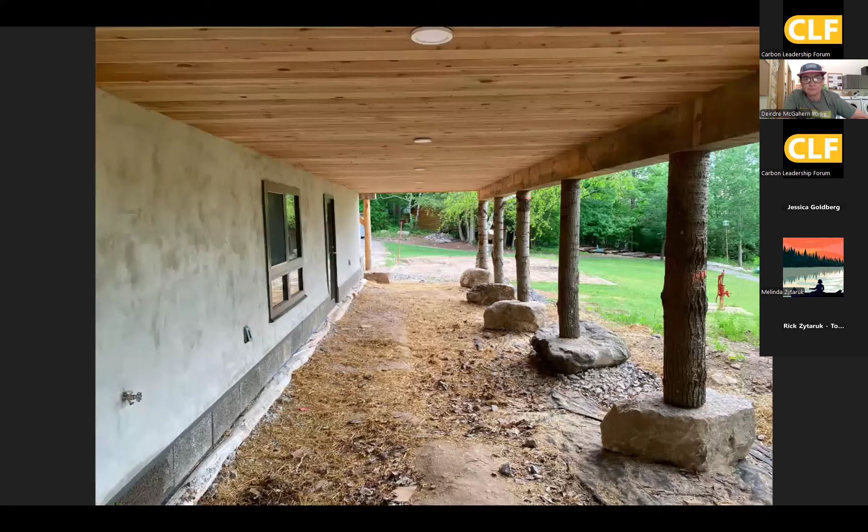Quick walk around. So I'm actually sitting right here. This is the entrance to the health center where kids would come in if they need a Band-Aid or something bigger than that. Then they'd go into the exam room where they would see a nurse. There's two sick rooms if they need to stay overnight. And then there's a nurse's quarters at one end of the building. So this is the living room.

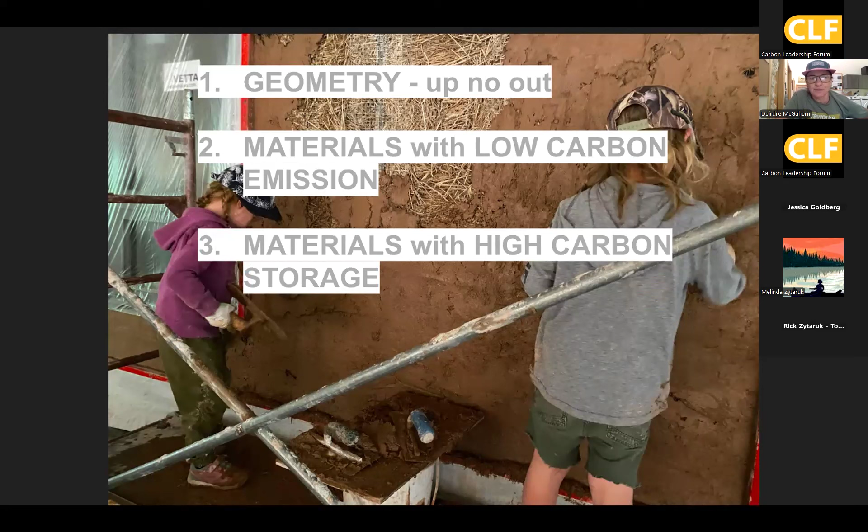So, how did we do this? Well, geometry plays a big part. We're going to look at that. And then also, really just every step of the way using materials with low carbon emissions and using as many carbon storing materials as possible to offset the emissions, which inevitably add up. This was bring your kids to work day, so I had to find a way to work that slide in.

If we're looking at the geometry here, the old construction adage that it's cheaper to go up than out is also true for embodied carbon. Foundations and roofs generally have high carbon emissions associated with them, whereas I see walls, floors, and roofs as empty cavities that we can fill with carbon storing materials.

If we had taken the same footprint of this building and spread it out, like into a long bungalow over a full basement or even a concrete slab with a full roof, the carbon emissions would have gone up. What you're looking at here is a partial walkout basement, just under half of the building. The back two walls backing into the hill are Nexcem, and then as soon as we could, we switched to carbon storing straw bale walls in the walkout basement, and straw bale walls above, with floors filled with dense packed cellulose and cathedral ceilings filled with dense packed cellulose.

Right off the hop, at the foundation stage, the building sits on a 2 foot by 5 foot bed of compacted stone instead of a conventional concrete frost wall that drains to daylight.

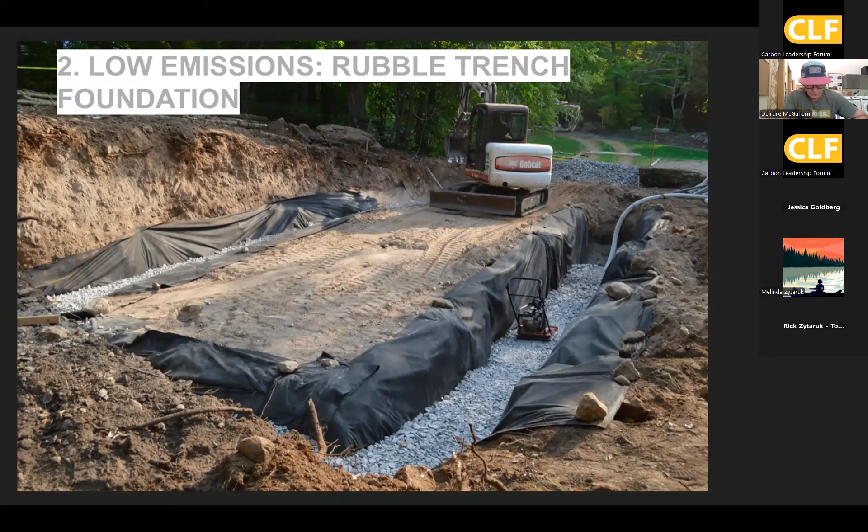By choosing concrete with the same strength but a 50% SCM content, we decarbonize the concrete fill in the Nexcem foundation walls by approximately 30% in just one phone call to our local concrete supplier. It's by far the easiest concrete or embodied carbon reduction that we can make.

We used leftover Nexcem blocks from another project for the two below grade walls, as I said before, switching back to carbon storing straw bale walls for the above grade walkout walls.

Nexcem is an insulated concrete form made of wood chips in cement from 75% recycled wood material. It's made here in Ontario.

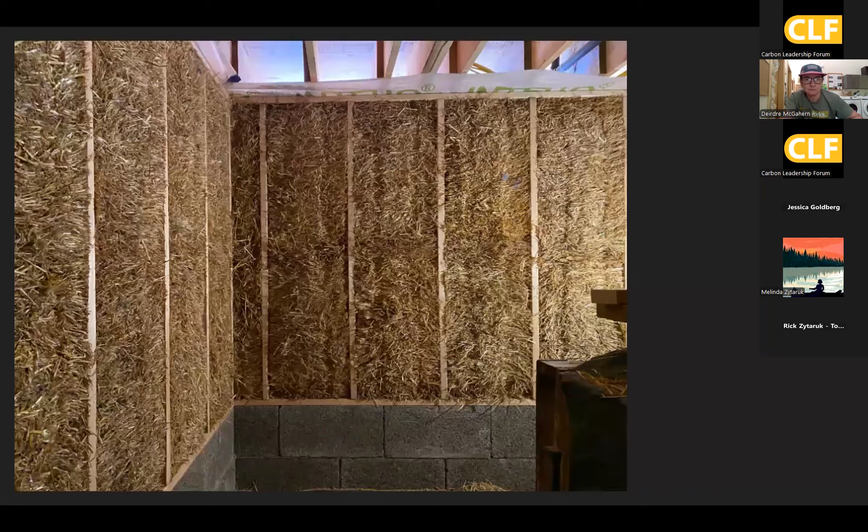These are the straw bale walkout walls on top of two courses of Nexcem block.

We unearthed these major boulders during the excavation and felt like we had to use them. We also took down some poplar trees. So in one quick phone call to the engineer, we were able to swap out concrete piers for big boulders, again sitting on a rubble trench foundation, and poplar posts right from the site instead of cedar posts.

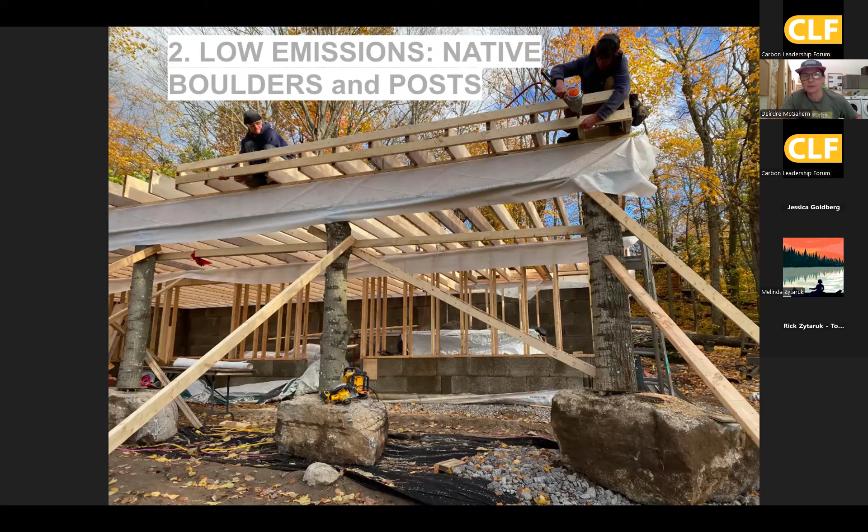I like to tell kids this story because the trees came down and then they literally went back up in the same location.

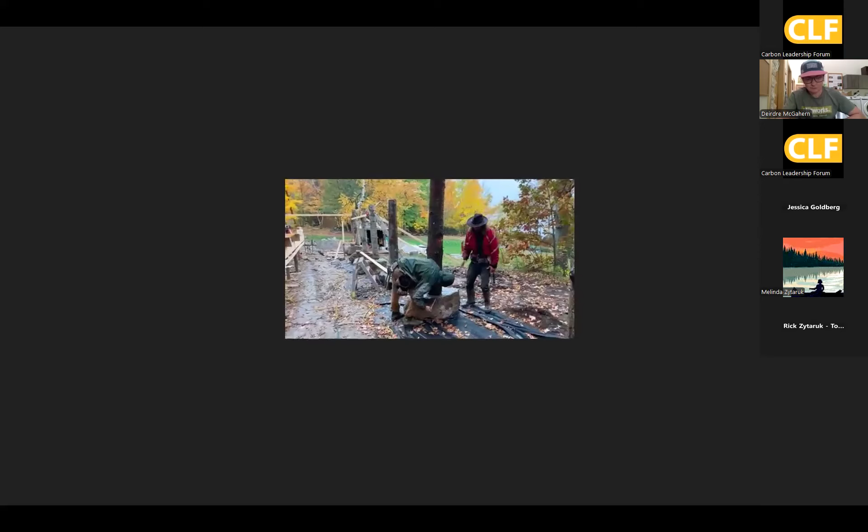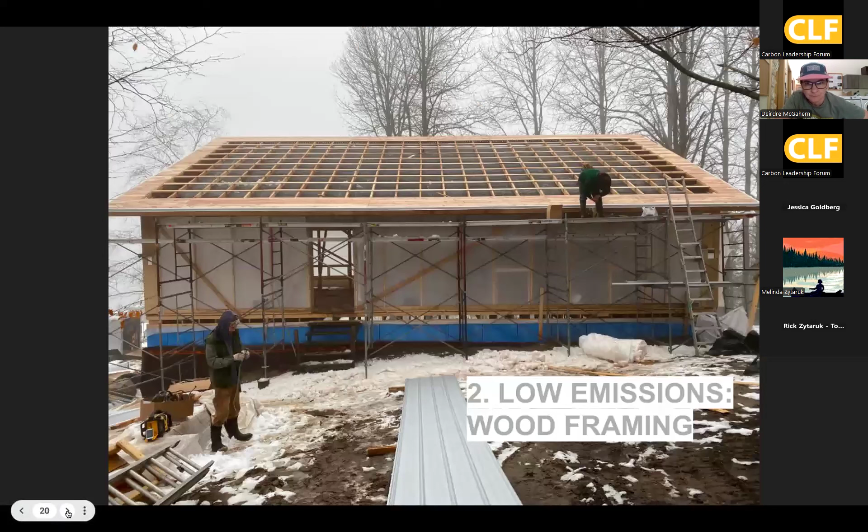Wood framing for the walls and the roof, again low emission. Get the roof on, and then the biggest climate hero on the job site is also our signature work.

Tightly fit between a double row of studs, the 300 bales are storing just over 5,400 kilograms of carbon. They're also locally sourced, highly regenerative, non-toxic, and offer excellent thermal performance.

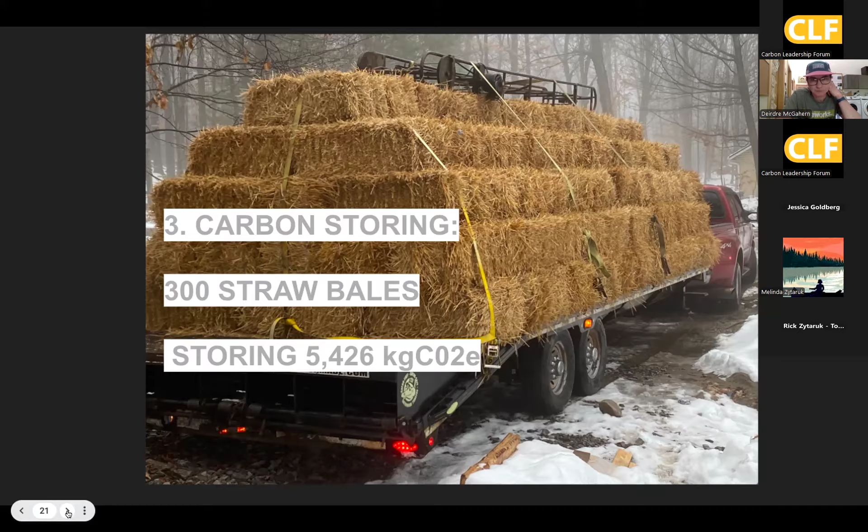We'd definitely be a carbon sink if we just filled the building entirely with bales of straw, but we do just put them in the exterior walls.

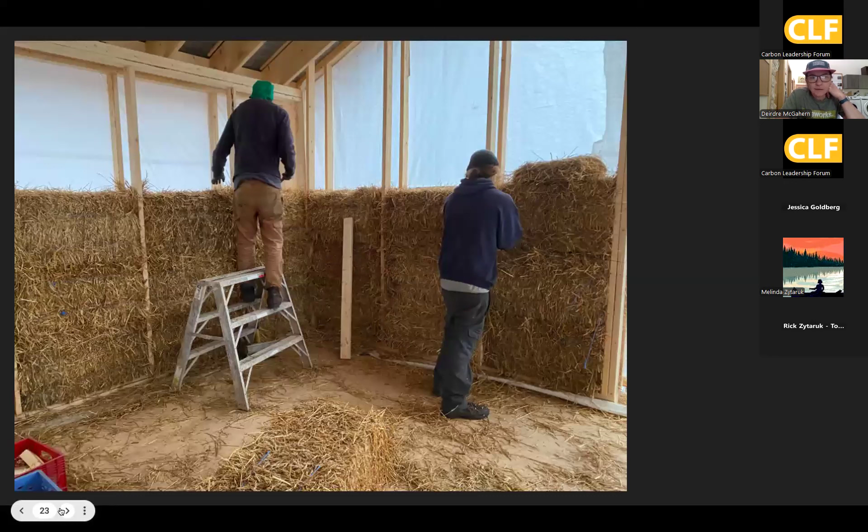This is what that looks like, giving them a haircut. Lots of prep work to ready the bale walls for plaster.

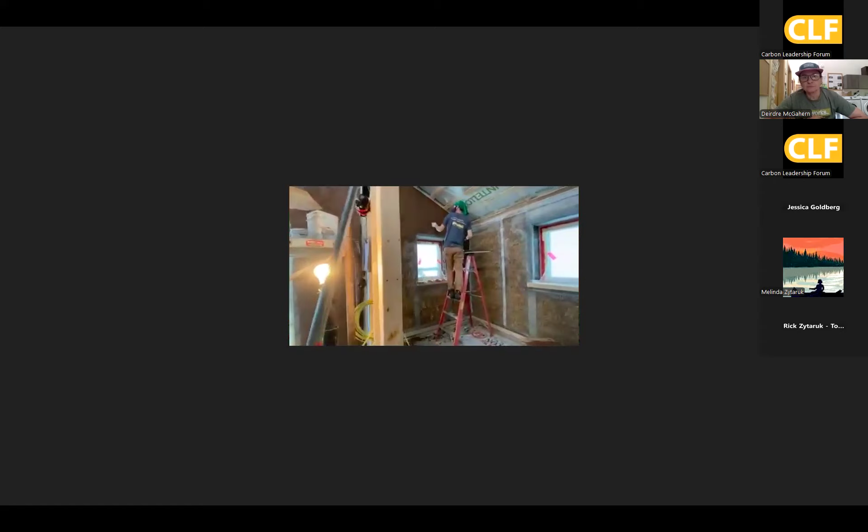The early straw bale houses in Ontario were plastered with cement, lime, and sand, and we haven't used cement in our plaster since 2009. Clay and lime offer better performance, less maintenance, and lower carbon emissions.

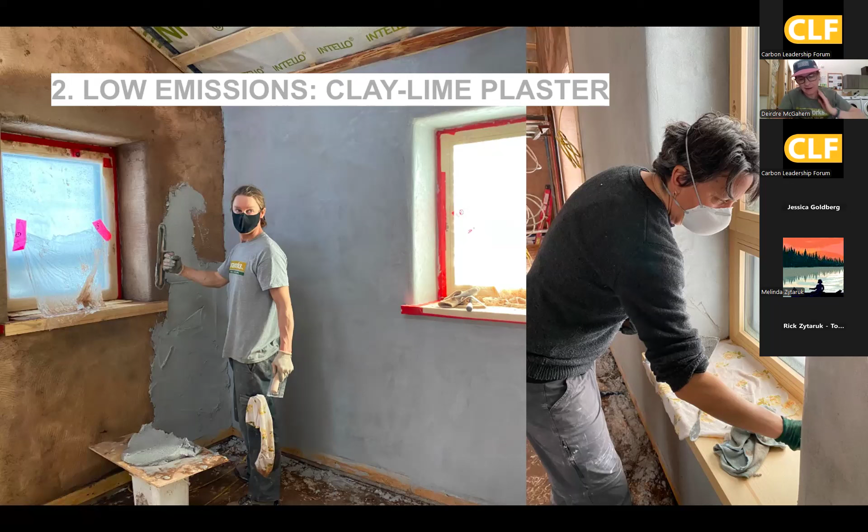The runner-up to straw bale walls is definitely dense packed cellulose. The cathedral ceilings, the wood frame floors, and some interior walls are all insulated with carbon storing dense packed cellulose. And it all adds up to an impressive 6,538 kilograms.

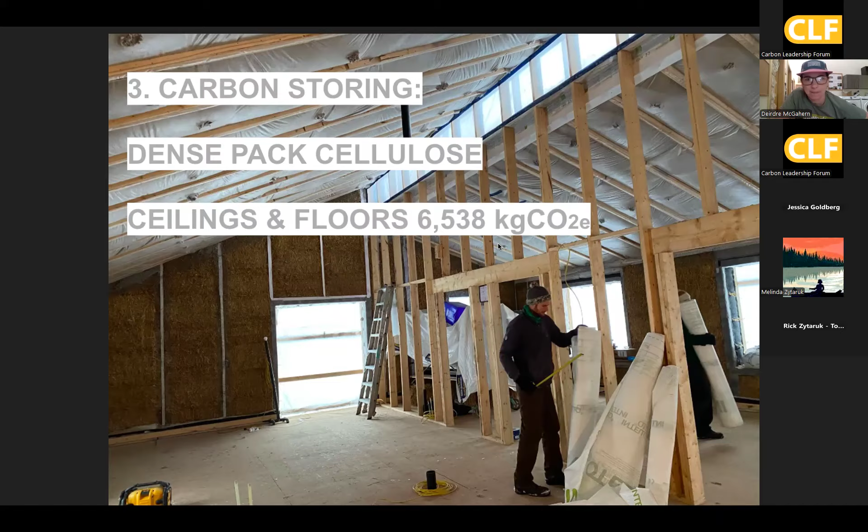We insulated the interior walls mostly for soundproofing with hemp bat. Maybe I can throw this out there - this is a test or a question for the group: is hemp bat a carbon storing material, or is it a low emissions material? We can come back to that.

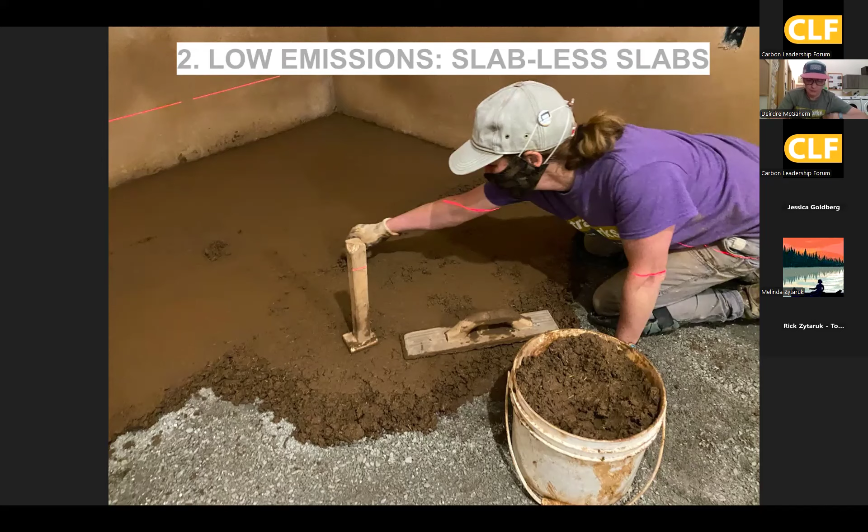Something else that we do is slabless slabs. So instead of calling the concrete truck back to pour a slab in the basement, we compacted a 5-inch base of limestone screenings over gravel insulation and topped it with a 3/4 inch earthen floor. We use cement, but sparingly and mostly for below grade and structural applications.

So the basement floor of the health center is insulated with two different types of recycled glass, Glavel, which is out of Vermont, and Poraver, which comes from Ontario. Both are made by heating and expanding glass into insulation suitable for below grade applications.

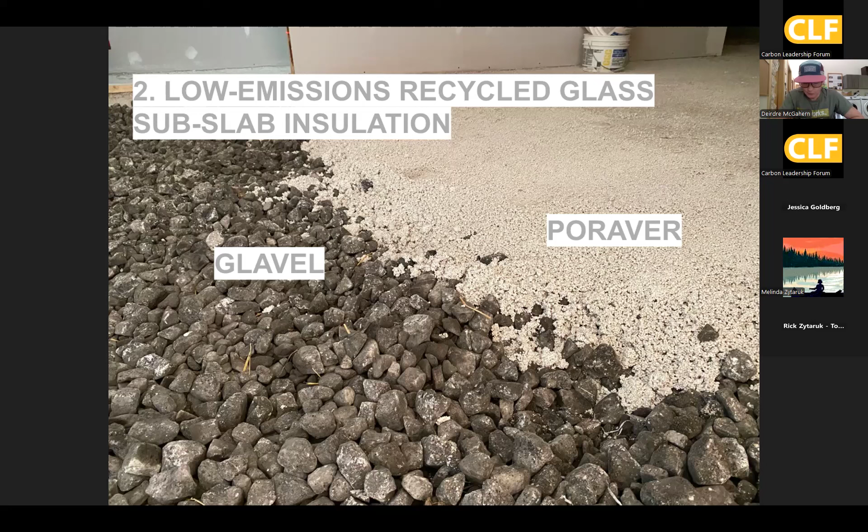Our earthen floors are glossy, water resistant, and hard like polished concrete floors, except the binder is clay instead of cement. On this project, we installed 173 square meters of earthen floors, on the main floor and in the basement. And at just 3/4 of an inch, this innovation is more in spirit than in drawdown reality.

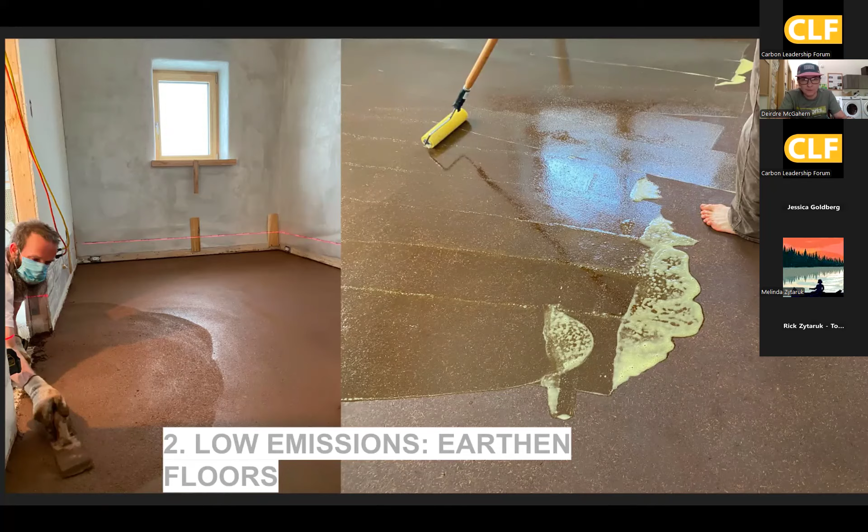Like straw bale walls, except that there is chopped straw in them that we use as fiber, these floors allow us to deliver the slabless slabs, which offer significant carbon reductions by avoiding cement. So those two innovations work together. Honorable mention to carbon neutral lime paint and green roofs.

The health center's operating emissions are also low thanks to the climate-friendly Sanden high-efficiency air-sourced heat pump. The Sanden uses CO2, a benign refrigerant, compared to the highly potent hydrofluorocarbons in most heat pumps. For the last 4 winters, it has solely heated all the domestic hot water and the health center hydronically through the earthen floors. It's all powered by Peterborough's relatively clean grid, which is 71% hydro, 28% solar, and 1% biogas.

So what's new and exciting? Well, I'm working today. We're building a sleep cabin right next to the health center at Camp Kawartha. And we're pretty pumped that we just insulated the cathedral ceiling with dense pack chopped straw.

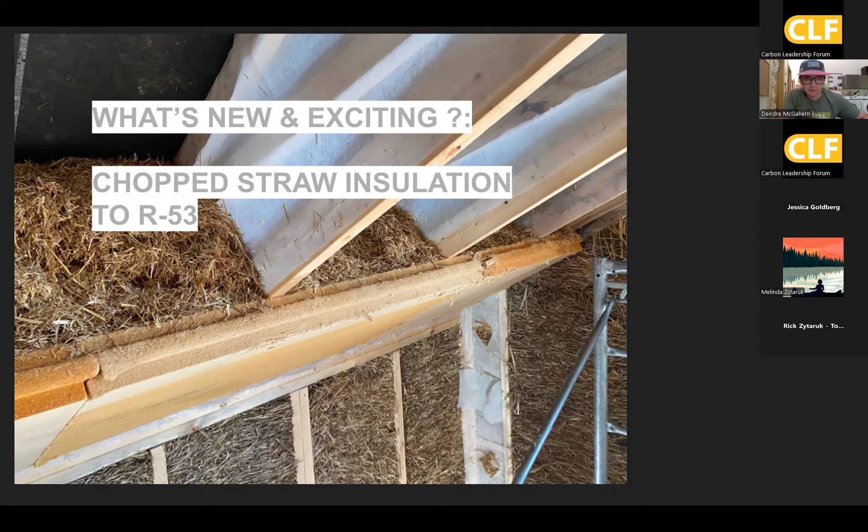Straw stores more carbon than any other insulation material. The 4,000 pounds of finely chopped straw that we dense packed into the ceiling is storing approximately 2,700 kilograms according to Beam, and that's 1,700 kilograms more than if we'd used dense packed cellulose, which is what we have been doing.

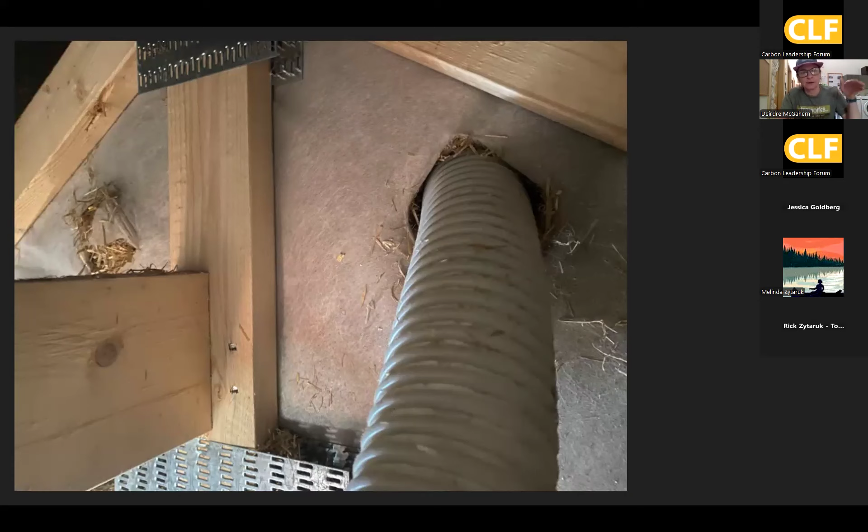We just hand packed as we worked our way up the roof, and then blew chopped straw to fill at the peak, blowing it through our dense pack cellulose machine. So the chopped straw R53 plus the Gutex R11 gives a combined R value of R64.

Lastly, I just wanted to say thank you to our partners, Camp Kawartha. They're amazing clients. Also thank you to the Carbon Leadership Forum. It really means a lot to me to have won this award. It makes all the hard work worthwhile. In posting and telling people about the award, it was also an opportunity to tell the story and talk more about what we do. I think healthy competition is good. So thank you, CLF, and thank you to Heather and Anya for organizing this event.

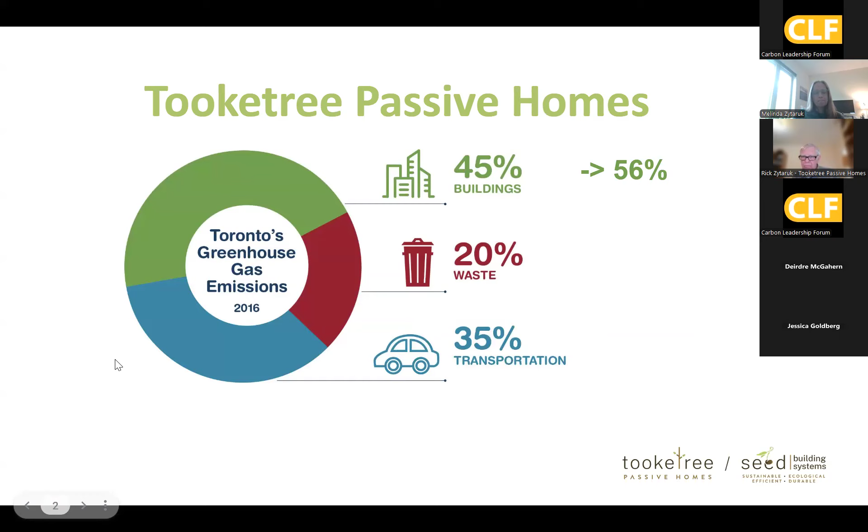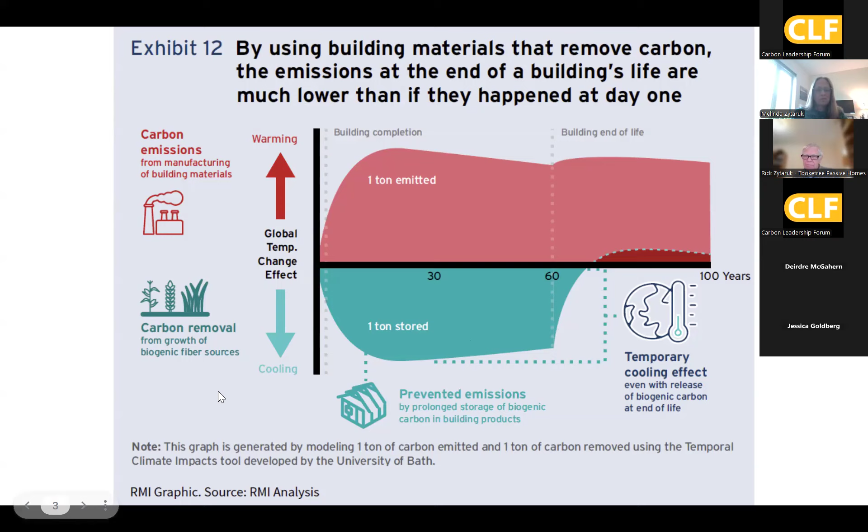Part of what we've been motivated by is the acknowledgement of and understanding of the need to address the carbon emissions of buildings. So when designing the panel, we again also shout out to the folks at Builders for Climate Action, and also RMI and Chris Magwood there, who helped significantly with the design of our wall assembly, as well as the work we've been doing in that sector, and all of our colleagues.

I had been working as a general contractor for a long time and was looking to see how we could accelerate some of the carbon reduction improvements into people's homes and into the buildings we were building, and also move some of our work offsite for health and safety of our workers and the quality of the builds, and not have to mitigate some of the exposure to the weather and other elements.

So we moved to prefabricated buildings, at least the wall, floor, and roof panels. We generally don't do volumetric. We focus on the panelization and ship panels to our sites.

A recent building that we built was a duplex, a 2-unit home, and that stored 5 tons of carbon, according to our beam work that was done in collaboration with Builders for Climate Action and RMI. And I guess I didn't really introduce myself properly at the beginning. I'm Melinda Zytaruk, and Rick is my father, who is also here.

We've been doing this business together since about 2018, and started manufacturing in 2019. But we've been collaborating in the construction sector for quite a while before that. I've been in the construction sector for about 20 years, and was in the renewable energy sector before that.

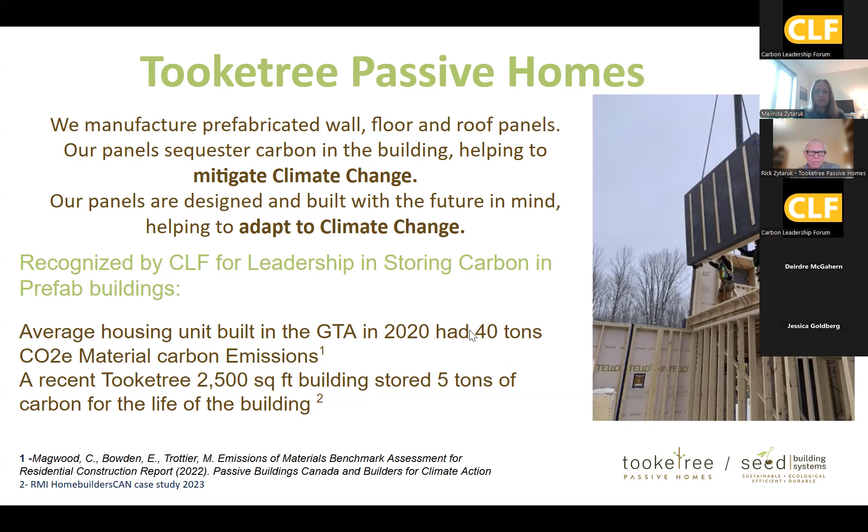One of the key motivators for us was good jobs and moving the sector forward. So our team is a core for why we do what we do, and how we do it, and a key part of our success. Most of our team members have stuck with us since they've come on board.

You also see here, we try to do advocacy whenever we can. They are all wearing emissions caps, which is part of a campaign that was brought to the COP meetings recently. So proudly wearing their accomplishments on their hats.

And Rick, do you want to say anything about what we've gotten through today so far? You're covering everything. I'm really excited to be in this business, grateful for the support we've had from the other builders, collaboration with folks like Deirdre, and for sure Chris Magwood, key to us getting along the way here. So shout out to Chris.

The builders in this industry tend to be less competitive and more collaborative than typical builders, and we really like that. The team here is an awesome team. They're all committed to doing our mission. They've bought into our sales pitch.

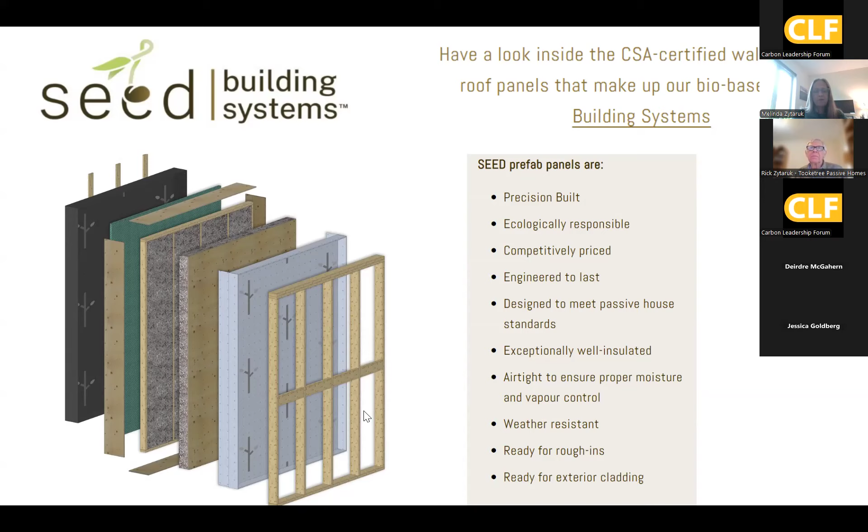So our vision of a sustainable building is as affordable as possible to build, buy, and operate. So we look at the total cost of building ownership and work to help shift the way that building financing is done as well. Of course, energy efficient. Most of our partners are striving for net zero or net zero ready and all electric usage for lower carbon. Of course, making sure that we're mitigating and adapting to climate change as much as possible.

Our primary clients, our top tier preferred clients, are not-for-profit affordable housing developers, multi-unit developers, folks that are prioritizing local community as well, and it's our value aligned.

We consider that all of our values and objectives are really interconnected and all equally important, and stack with each other to help us be better at meeting the intent of all of our values. So how we run the company, who we hire, how we work together, what we pay folks, what the culture is, who we work with as clients—all of these things are key, as is our approach to intellectual property. Rather than try to patent or own the design or prevent others from doing similar work, we have licensed our panels under Creative Commons so that others, if they choose to emulate or use parts of what we've developed, can do so as long as they share that openly as well, and share any improvements they make with everybody, back with ourselves and publicly.

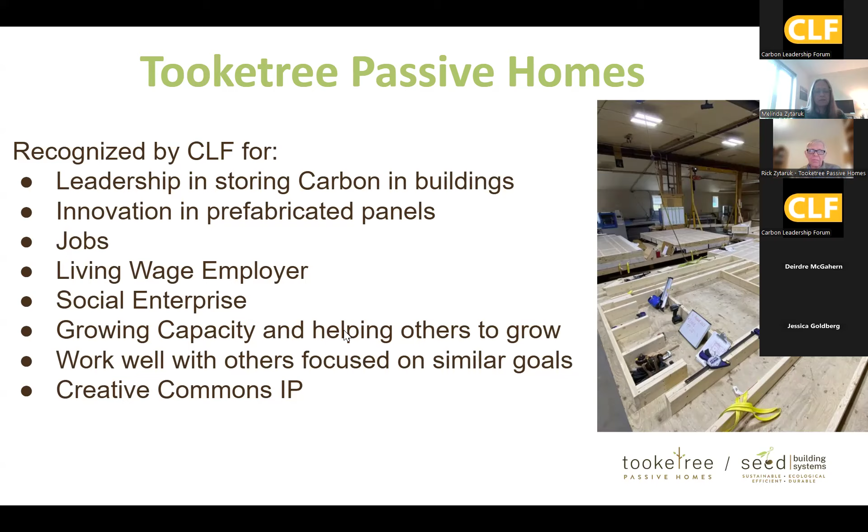So thank you again to the Carbon Leadership Forum. This is such a great opportunity to celebrate the achievements that we're all making in the sector, and create the conversation about embodied carbon and keep that important goal out there, and provide more opportunities for us to not just celebrate, but to have that healthy competition, talk to each other, share what we're all doing, and help each other do better. So thank you very much.

So thank you again very much, we really appreciate it. Yeah, thank you, Melissa—or Melinda—and Rick. Also great to see. I have a question, but I'm going to save it for after.

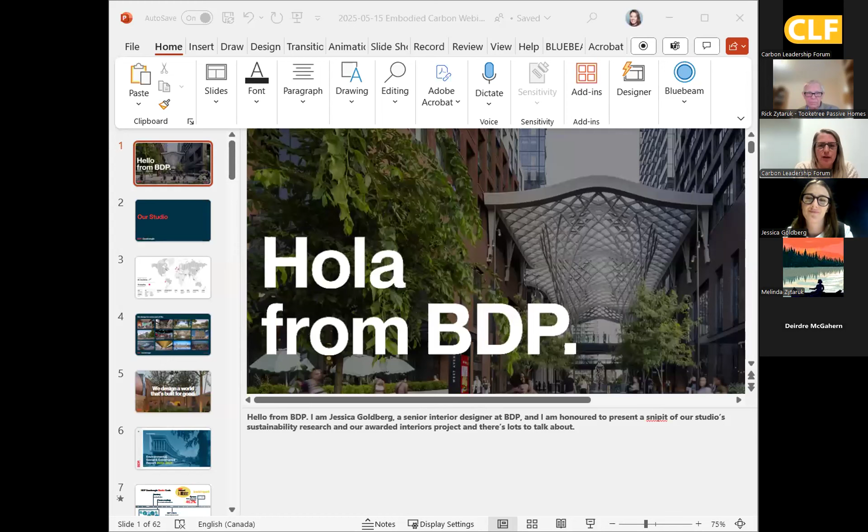Everyone can see full screen? Yep. Yes.

Hello from BDP. I'm Jessica Goldberg, a senior interior designer at BDP, and I'm honored to present a snippet of our studio sustainability research and our awarded interiors project. There's lots to talk about.

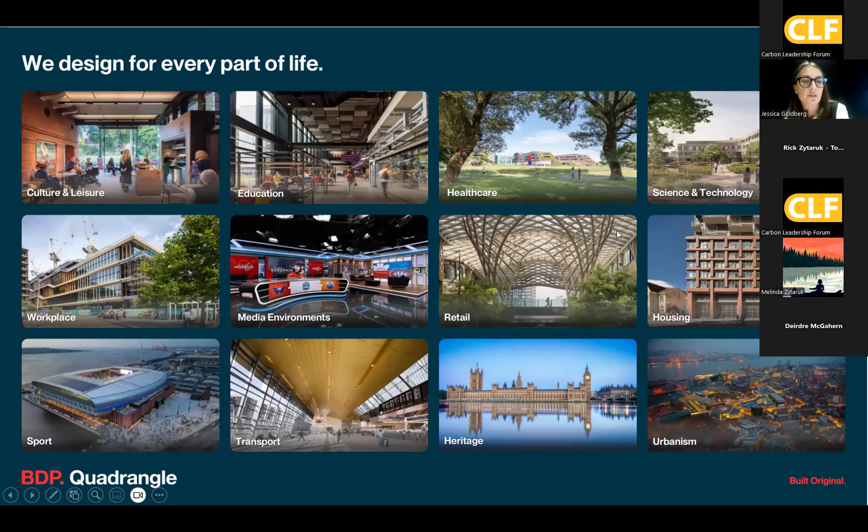A little bit about our studio: we have 19 studios around the world and projects in more than 45 countries. We design for every part of life, from education to multi-residential towers, from media to workplace. Our global mandate is that we design a world that's built for good. We've issued our first complete ESG report this year, which is very exciting.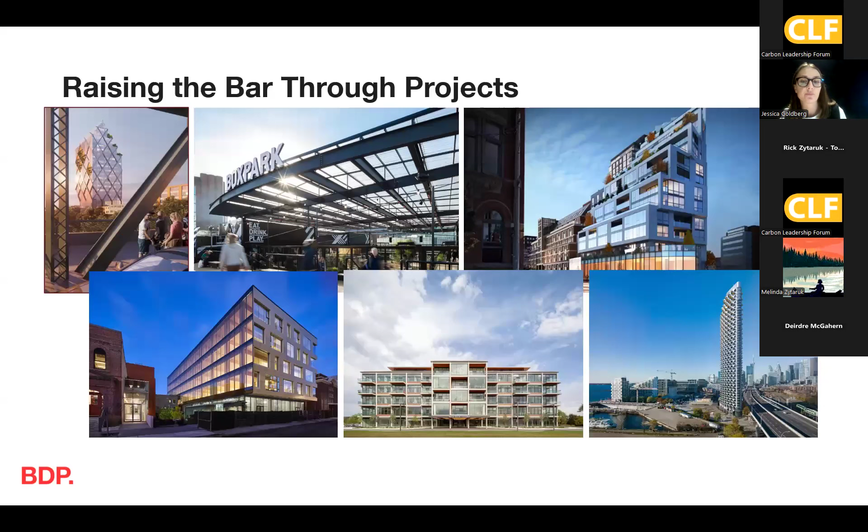This document is about measuring how we're doing year over year and being transparent about our progress. At our Toronto studio, we've created a roadmap to get to a 46.2% reduction in scope 1, 2, and 3 emissions by 2030. In 2024, we achieved this, and a remarkable 100% reduction for scope 1. We take a lot of pride in the work we do and the projects we dedicate ourselves to, and we're focusing our efforts to raise the bar on sustainability achievements.

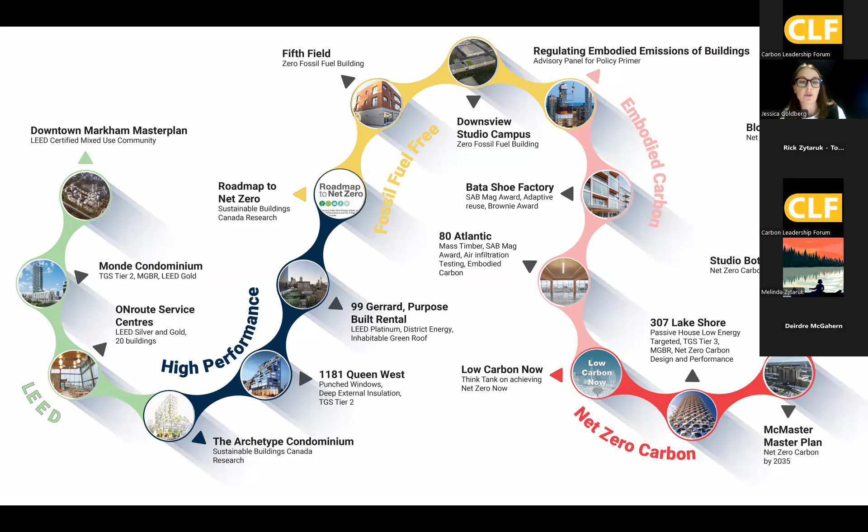Our project roadmap reflects sustainable market shifts, starting on the left with LEED and transitioning to net zero carbon on the right. At the transition of these market shifts, we're releasing research that aids in the collective sustainability knowledge. As we focus our attention on the drive for net zero carbon, this timeline shows the pathway, indicating the percentage of projects we're targeting to meet these operational and embodied carbon targets each year. You'll note this is not projected to be linear, but exponential, until all buildings are net zero.

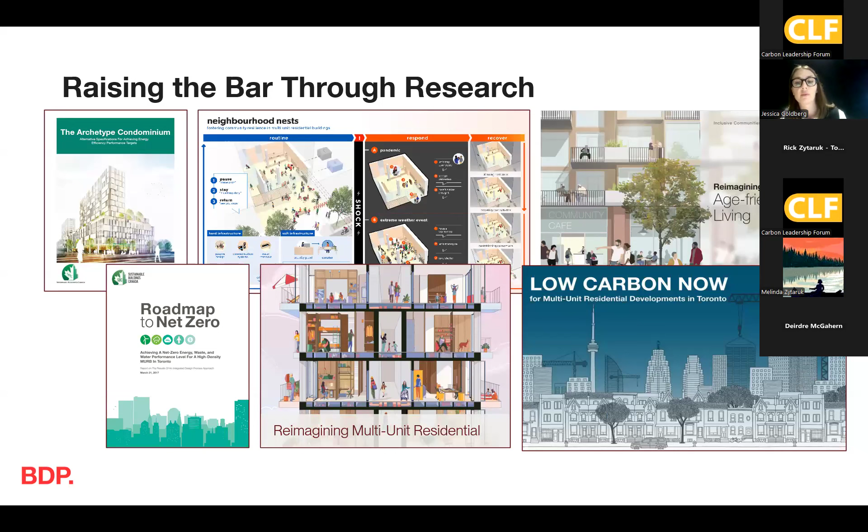Which leads us to our research, in which we're seeking to raise the bar. Low Carbon Now is one of our major starting points for researching embodied carbon and discussing pivotal moves to get high impact now. Low Carbon Now transitioned into industry collaborations and the formation of a think tank of leaders coming together for an integrated discussion about accelerating the path to net zero. Finding ways to decrease carbon trajectory is key—the time to act is now, and the decisions we make today will impact the carbon trajectory of a building for its lifetime.

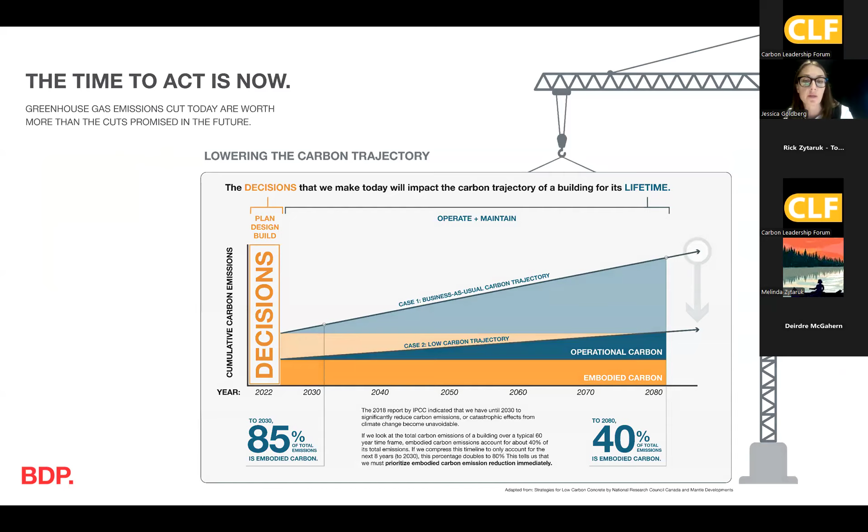The whole life carbon footprint is a way to assess operational and embodied carbon simultaneously. It runs from cradle to grave—from product material extraction to ultimate building demolition, or better still, deconstruction—giving us a good indication of the carbon impact of a building's lifetime. If we take the Toronto metrics and map them over a 60-year service life, we see that the whole life carbon of a building operating under today's requirements is still dominated by operational carbon. The band at the bottom represents the upfront embodied carbon only at this time, and depending on the life cycle of material used, this value would increase due to maintenance, repair, and replacement.

As we move into 2026 performance standards, we see the operational carbon target coming down, as well as the new embodied carbon targets coming into play. By the time we get to 2030 targets, the embodied carbon target drops again, and we see the impact of operational and embodied carbon equalizing.

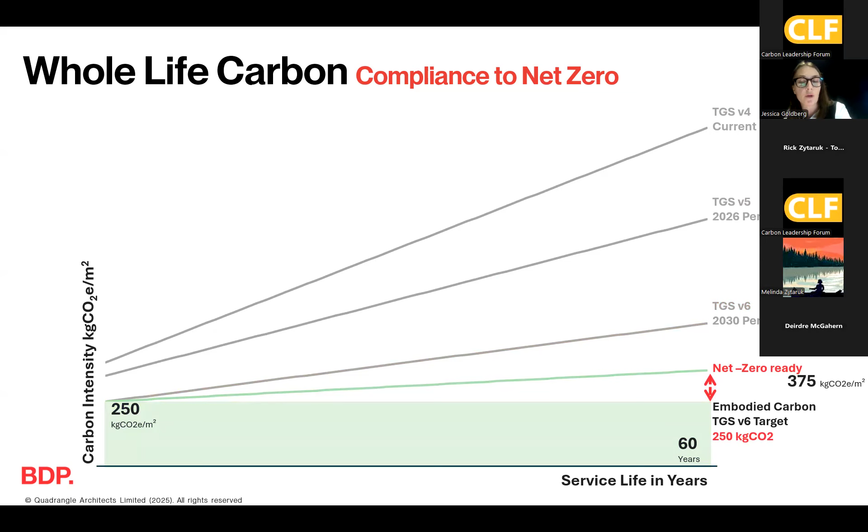And moving into a net zero ready building, we see the tipping point where embodied carbon now overtakes operational carbon in terms of whole life carbon impact. As the performance improves, embodied carbon becomes the driver.

Our latest research about embodied carbon in design highlights the importance of early design decisions from envelope expression, design form, and material selection, and that those choices can impact embodied carbon intensity.

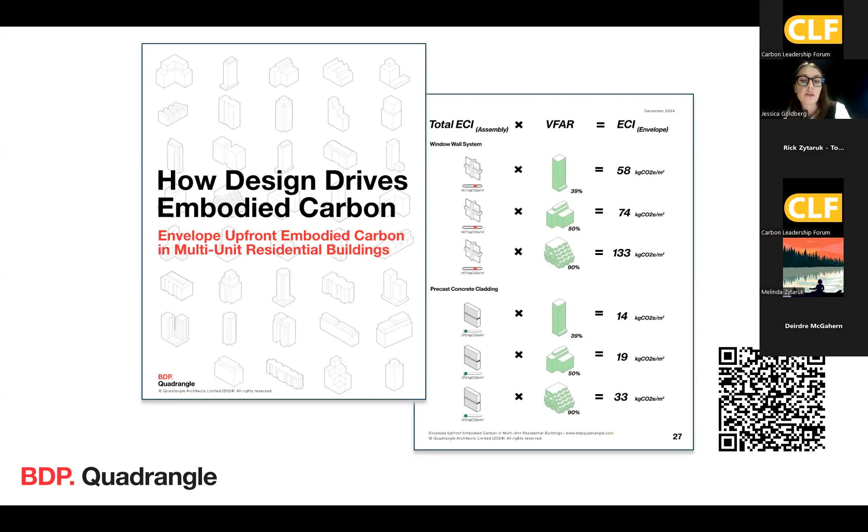But today we're here to celebrate the design and sustainability story of our Toronto studio. This project was very much an all hands on deck effort and an experiment on how to successfully tell the story of our dedication to not only a beautifully designed workspace, but one that has a sustainability story to back it up. We are so honored to have been awarded the Ontario Embodied Carbon Award for Interiors.

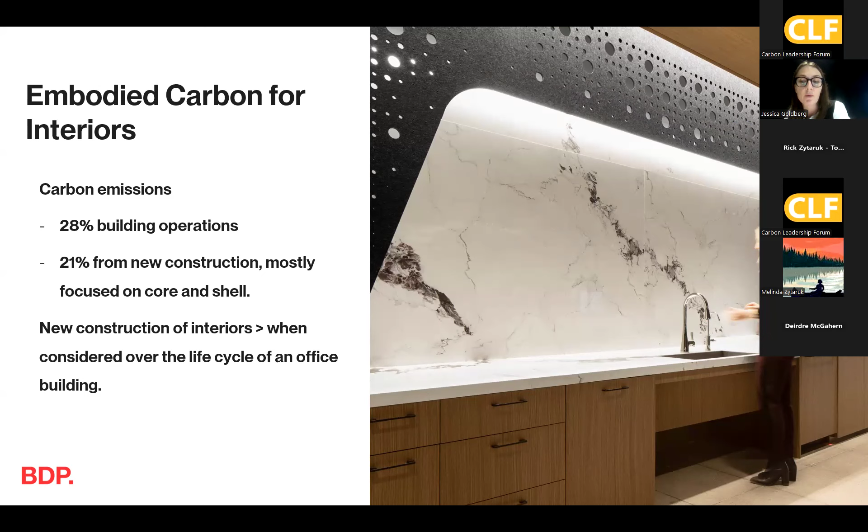Globally, the building sector accounts for approximately half of all carbon emissions, of which 28% is from building operations and 21% from new construction. For new construction, the focus has almost exclusively been on core and shell, the envelope, the structure, and central systems. Now data is showing that carbon emissions from new construction of interiors can be much greater when properly considered over the full life of a building.

This project came about when we became the North American headquarters to BDP in 2019, and as our previous lease of various floors and parts thereof at 901 King West was coming to an end. The ability to lease 2 levels, 21 and 20, of the Well, a LEED Platinum certified building, would give us the opportunity to regroup our previously scattered teams and become a home that aligned with our sustainability goals.

Designed at the height of the COVID-19 pandemic, the creation of our new studio was an exercise in flexible post-pandemic workplace design while championing innovations in sustainability. We spent time as an office thinking about how we wanted to work.

The design philosophy had the following in mind: wellness, people-centered design with wellness at the core; sustainability, embed smart and creative design thinking by upcycling and act as an exemplar of sustainability; inclusivity, the physical environment will be fully inclusive and wired for accessible technology; innovative, we'll embrace innovative thinking in sustainability by making the studio a living lab; and agile and resilient, supporting hybrid working and flexible to adapt to an unknown working landscape.

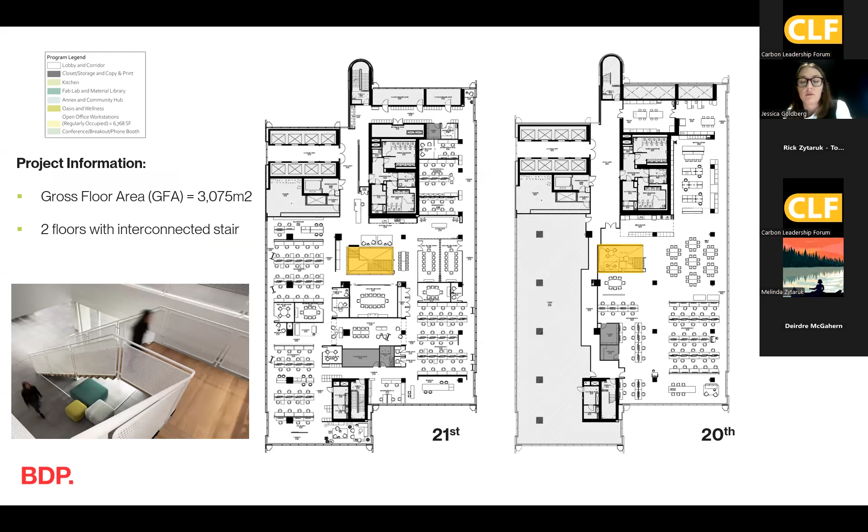The gross floor area of our studio is 3,075 meters squared. We have 2 floors on 21 and 20, connected by a central stair highlighted in orange. On the 21st floor is our reception, and you can see various neighborhoods, working neighborhoods that are home to our various design teams throughout the office.

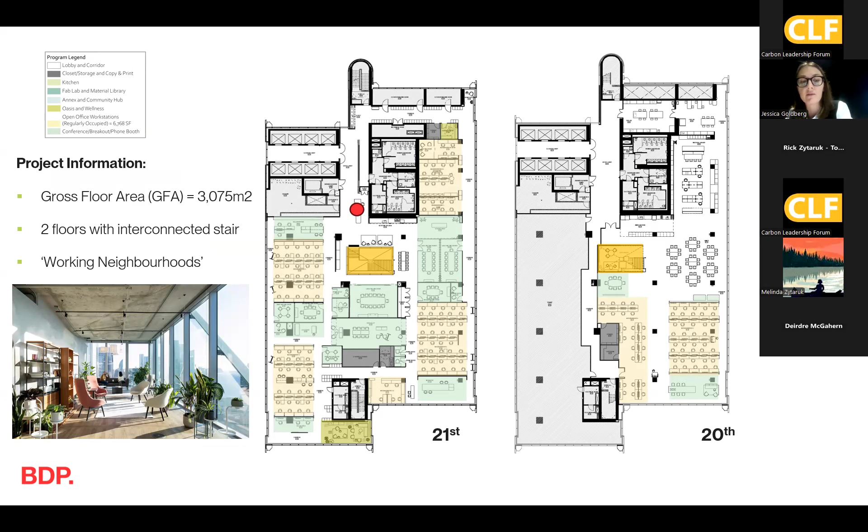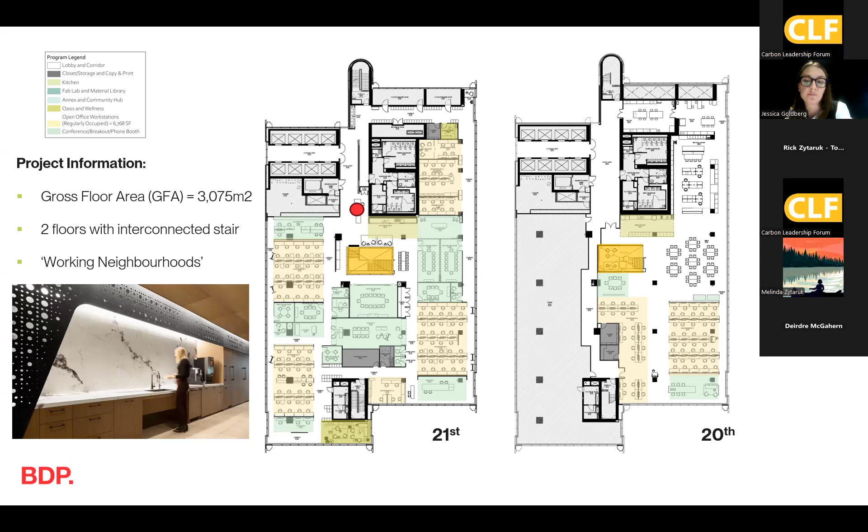We also have 2 wellness areas. On the south end is our Oasis, and on the north end is our wellness room. We have nourish areas on both the 21st and 20th floors. In light blue, our open annex and community space on the 20th floor, and last but not least, our materials and fabrication lab at the north end.

Our design team and sustainability teams collaborated to establish and then follow 3 strategies for a successful and responsible new workplace. The vision had 3 elements: health and well-being, whole life carbon, and performance.

We set parameters for health and well-being so that our staff would not be exposed to harmful substances. We would monitor indoor air quality and maximize biophilic effects of materials and contribute to a productive and active culture.

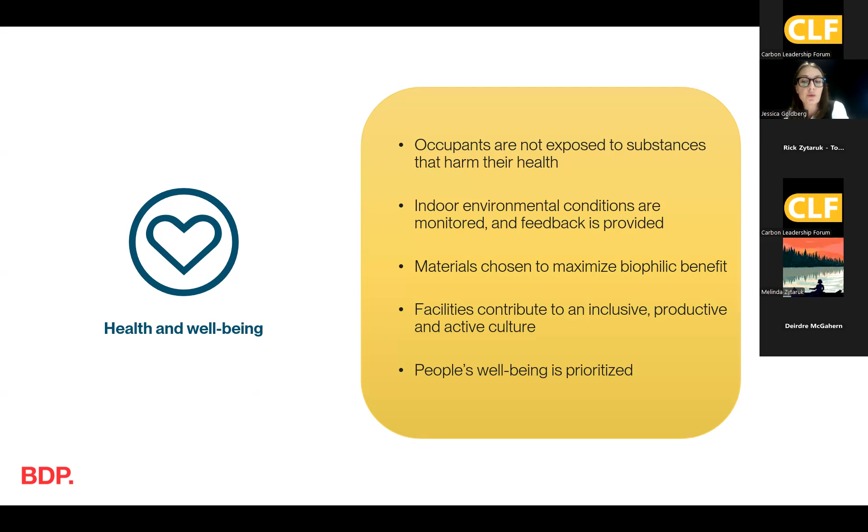To ensure our work environment is free from harmful substances, and in assessing the materials used in the office, the Living Building Challenge LBC Red List was referenced. In referencing the substances list, several materials were switched out for alternative Red List free specifications.

Internal environmental conditions are monitored with a number of IAQ monitors placed around the office. We've implemented a cost-effective brand called AirThings, which link via Wi-Fi to a live dashboard. They are aligned with the requirements of the WELL standard.

Our design and material selection focus around incorporating nature in the form of plants, natural materials, and natural shapes. We found that whole life carbon analysis and design was in its infancy only a few years ago, but committed to use circular economy principles for our move and embed them into the design, construction details, and operation of our space.

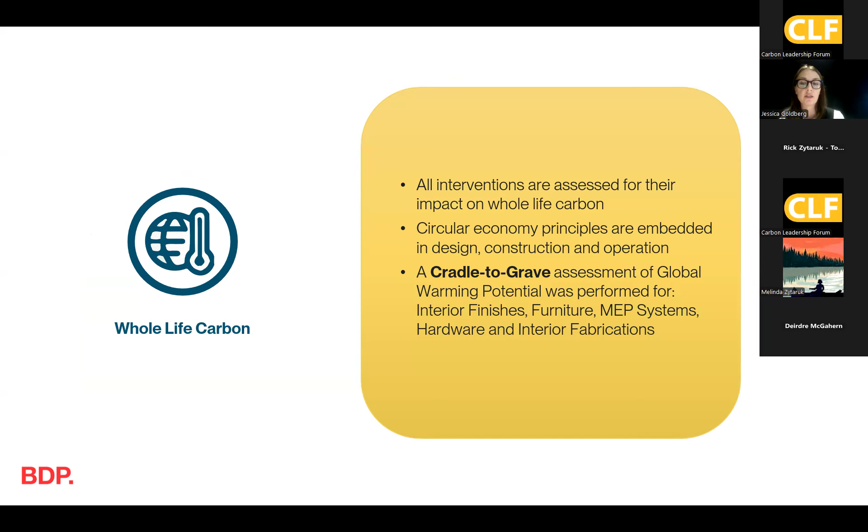The tools we used to analyze were One Click LCA, the EC3 toolkit, circular economy principles, and a well-developed Revit model for material takeoffs. Through research, we established some baselines and set the industry baseline at 200 kilograms of CO2 per meter squared. The stretch was set at 150 kilograms CO2 per meter squared, and we determined that an industry-leading project could be set at 136 kilograms of CO2 per meter squared.

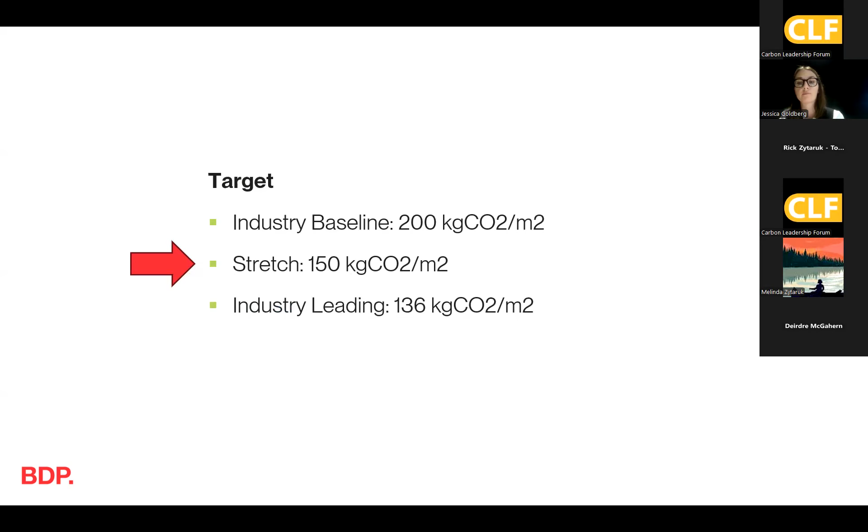Being designed in the midst of COVID, and with our knowledge of supply chain issues at the time, we decided it was reasonable to target between the stretch and industry leading. Last but not least, we set specific, verifiable targets so that our studio could be an exemplar of innovative design for us to learn from and evolve.

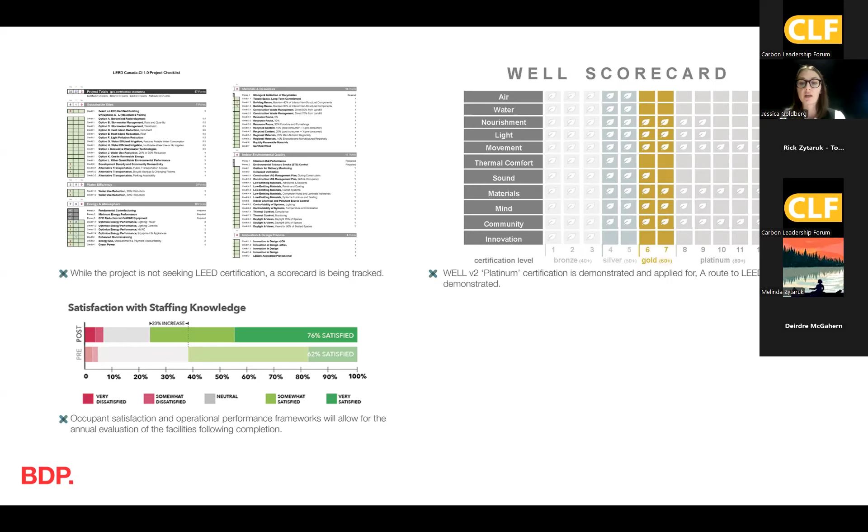Although we weren't seeking LEED certification, we did use the scorecard to track progress. We also tracked and targeted WELL certification and made sure that our employees are satisfied with the operational performance of our space.

The driving pillar of the studio design was to embed smart and creative design in the strategies we undertook to reduce carbon. The first strategy was to build less. Our concrete columns are left exposed, our raised access floors are celebrated, flooring is applied selectively, and our ceilings are meticulously coordinated to let the conduit layer on top of the exposed concrete ceilings without offense.

We celebrated design moments in the office and focused on those to provide destinations in the office. We also built light. Our back alley, aptly named as a homage to alleys of Toronto, and like an alley layered with years of graffiti, our back alley is a pinup space and crit space with layers of design iterations and studies. This space is one example of building less.

The acoustic ceiling tiles were strategically removed in a purposeful way to create a random, deconstructed grid—a creative way of using less of a given material to do the same work.

A large contributor to our carbon reduction was to think of upcycling the inventory that we had at our previous office. This was both an opportunity to create a resilient and sustainable workplace, and a creative way to pay homage to the evolution and history of our studio by upcycling materials, products, and furnishings. This inventory was large: case goods, light fixtures, equipment, appliances, desks, chairs, and everything in between.

We challenged ourselves to reduce as much carbon as we could. Our materials and quantities were analyzed through One Click LCA, and we underwent a robust analysis of the specifications and their associated EPDs. We conducted an embodied carbon study through One Click LCA during design development to test the material selections, as well as at construction completion to verify the design.

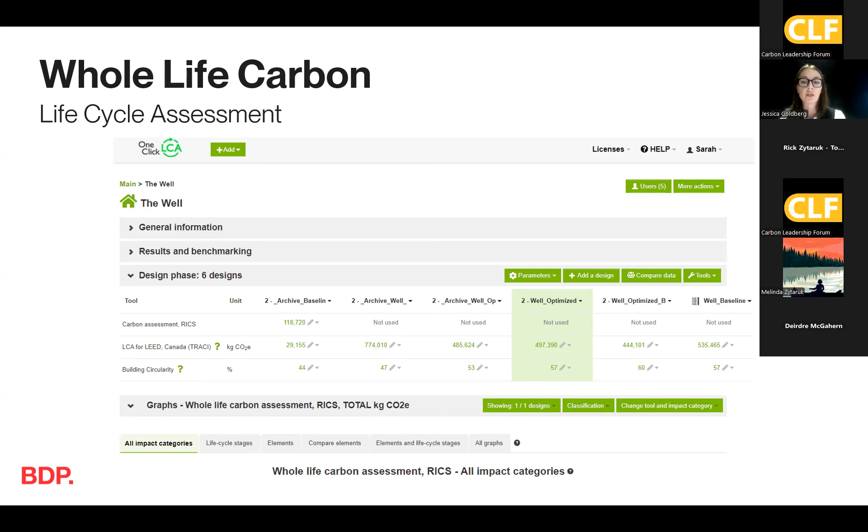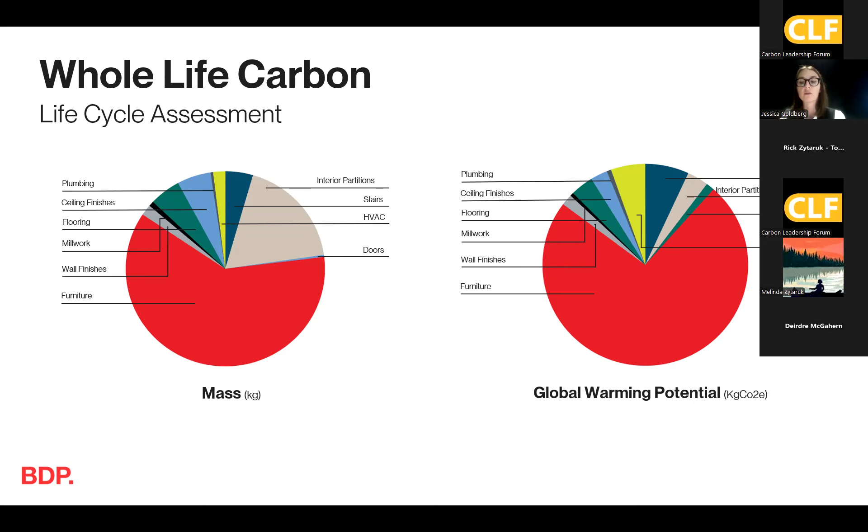The carbon content and global warming potential for the design element categories are then assigned, as can be seen in the right-hand side graphic. You will notice that furniture becomes an even larger portion of the overall pie when the GWP of partitions goes down due to its associated carbon intensity. This type of breakdown is typical of interiors projects. It's also important to note that this is a representation of the studio with all new furniture.

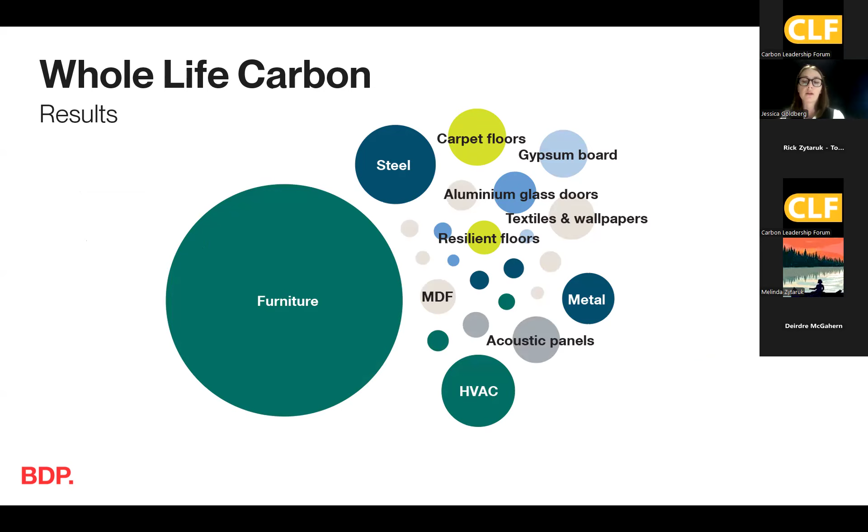This bubble diagram is a graphic depiction of carbon content by category and a further breakdown of material categories. Again, furniture is the largest, but other categories have now grown in proportion to the carbon intensity, such as steel from our staircase, HVAC—which is already laid out in an efficient manner in the raised access floor, so we weren't likely to reduce carbon there—and carpet, then metals and gypsum.

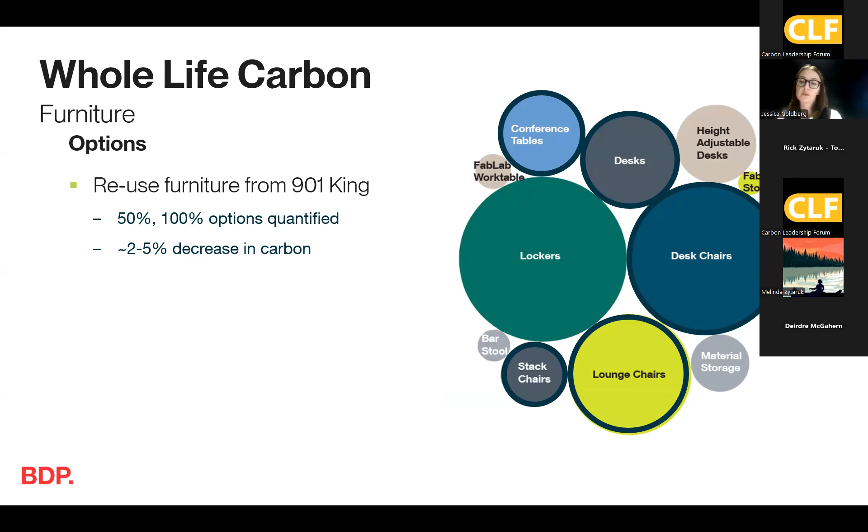Two options were assessed based on this: what would be the reduction if 50% of the furniture was reused, and what would be the effects if 100% were reused? The results suggested a 2 to 5% reduction in carbon. Chairs were the largest carbon contributors that we could rely on for reuse. All of our chairs were used for our new office. We also looked into options for carbon neutral products in the case that any needed to be replaced.

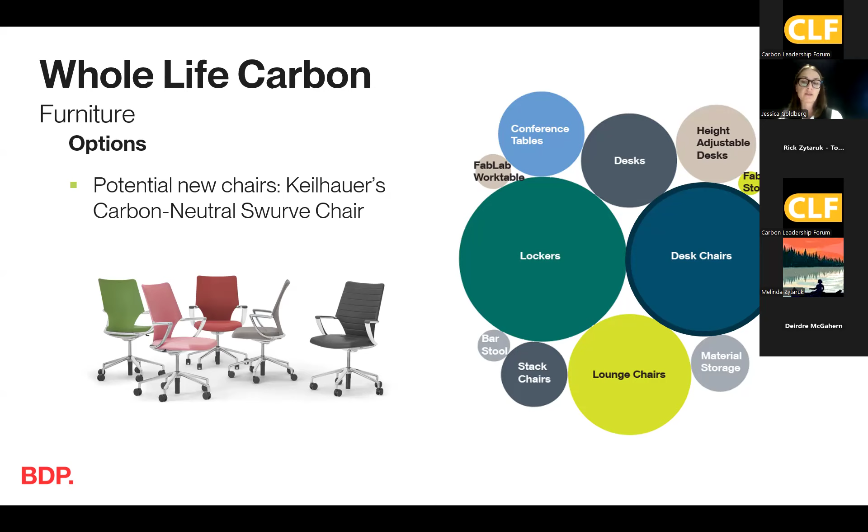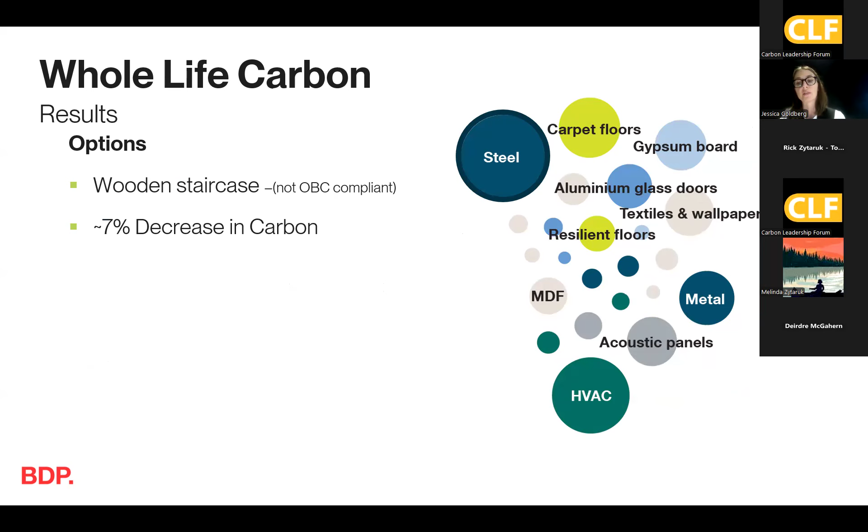Plan B was to purchase Keilhauer's carbon neutral Swurve chair. When we went back and looked at the steel within the project and how we could reduce it as a carbon intensive material, we looked at the components of the stairs and how we could mitigate carbon. A wood alternative is better, but this is not OBC compliant. If the stair was changed, it would have equated to a significant 7% decrease in carbon.

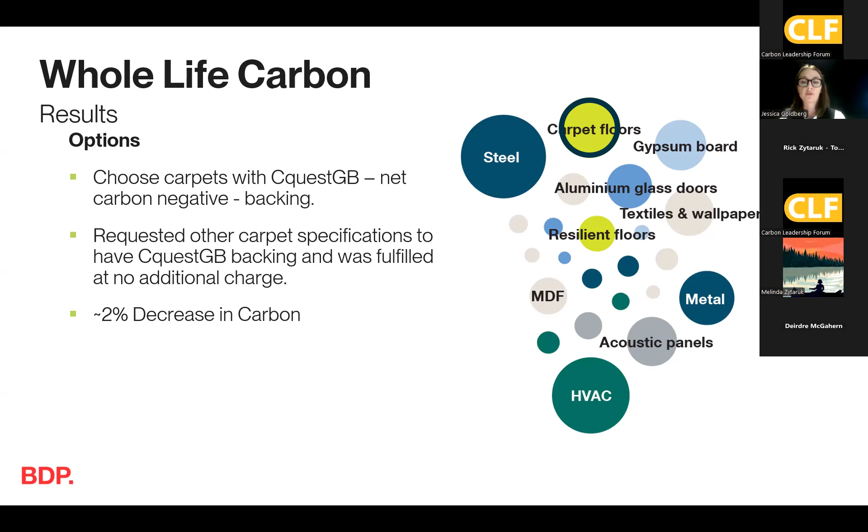Carpet was another big offender in the project. We had specified carpets for floor covering in all of our working neighborhoods due to its acoustical properties. In working with one manufacturer with an aggressive sustainability platform, we were able to choose carpets with an embedded net carbon negative backing. We then pushed all of our carpet specifications on the project to follow suit. This resulted in a 2% decrease in carbon.

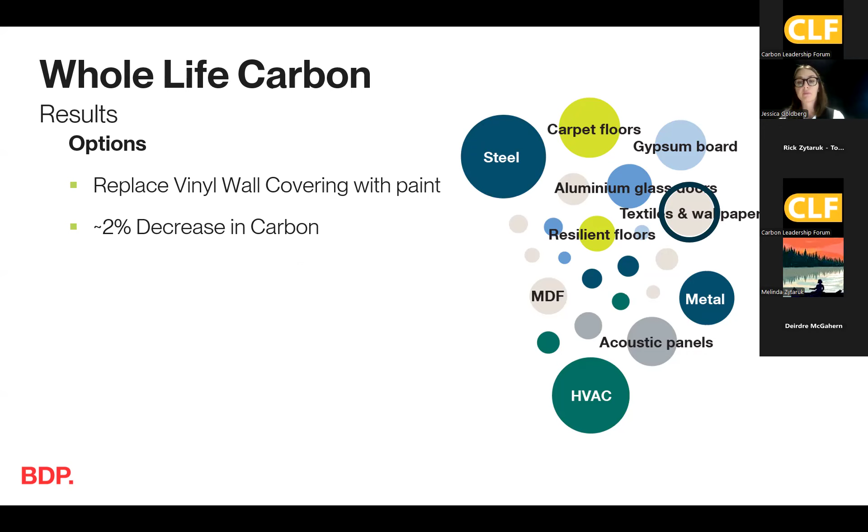We looked at our wall covering suppliers about replacing the backing with less carbon intensive materials, and where we could, replacing wall covering with paint. This resulted in a 2% decrease in carbon. The last significant specification substitution was to replace LVT with linoleum. This reduced carbon by 1%, and it's also better for our health.

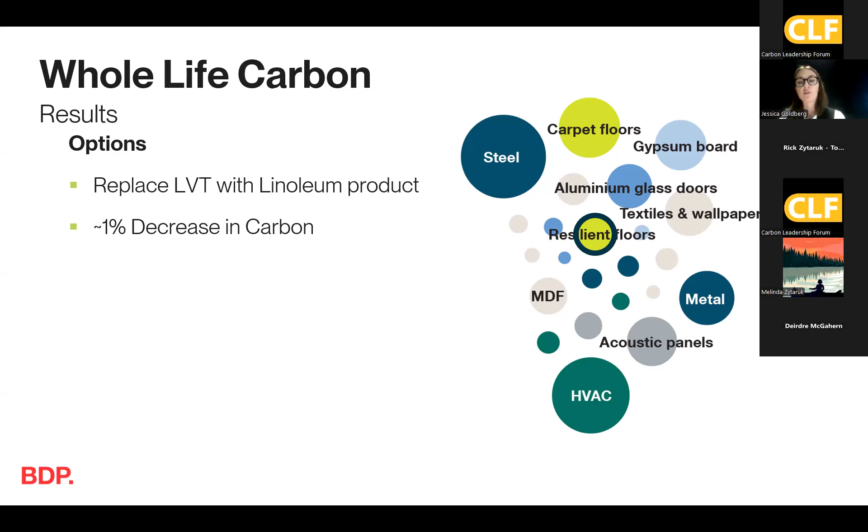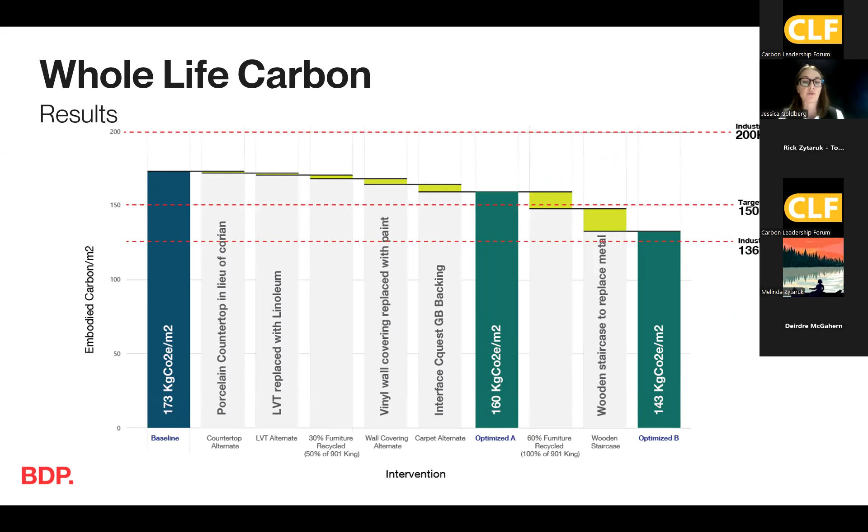The LCA was rerun at the end of the project to verify. We can see the final embodied carbon was verified at 166 kilograms of carbon per meter squared.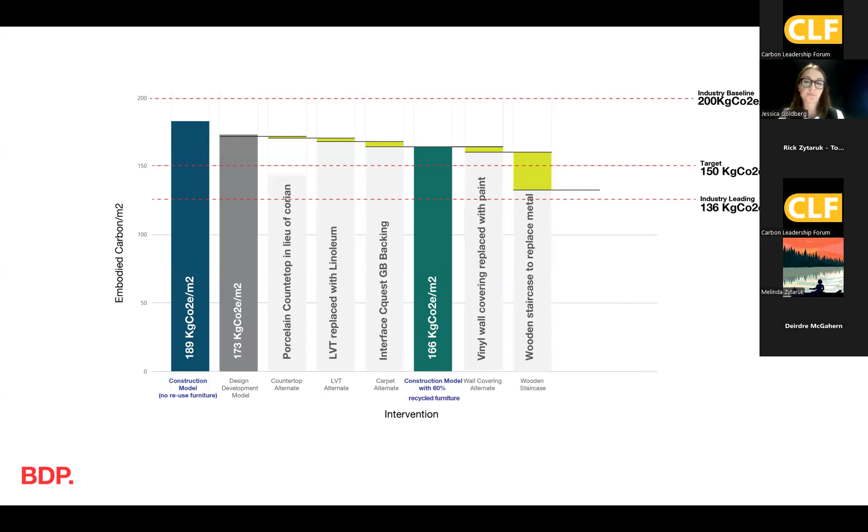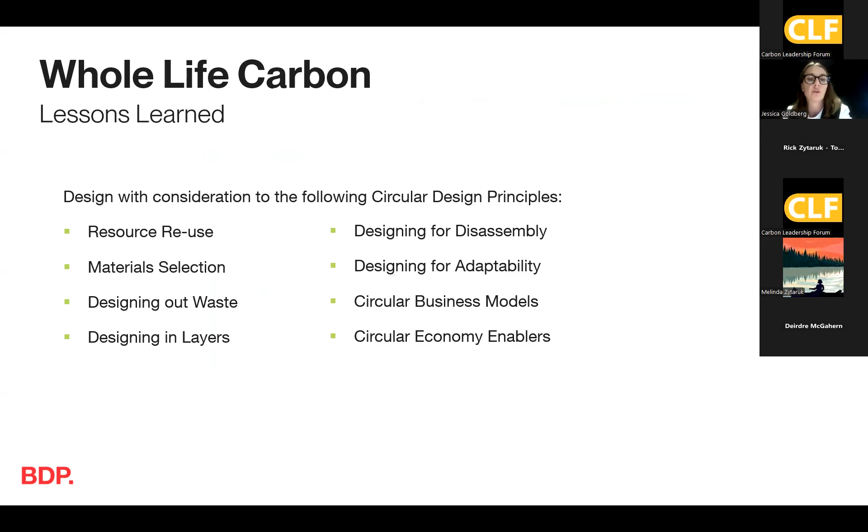The lessons learned were to resource re-use, material selection, designing out waste, designing in layers, designing for disassembly, designing for adaptability, circular business models, and circular economy enablers.

We also just wanted to quickly point out that we're very proud that our studio has achieved WELL Platinum certification just this month. A review of the WELL certification project directory revealed that we are one of only 9 Platinum certified projects in Canada, are the first architecture and design studio who's Platinum certified in Canada, and it's our first BDP project to receive WELL certification.